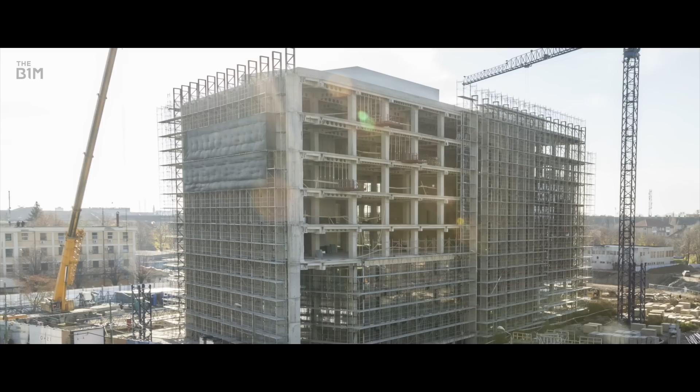While the relentless pressure to construct homes at a rapid rate here does result in some less than desirable schemes coming to fruition, fueling continued debate around housing standards, planning regulations, political representation, social cohesion and inequality, the intensity of the challenge is in fact breeding innovation from some of the city's foremost architects and developers. From urban dentistry to embracing cross-laminated timber, these remarkable schemes master their highly demanding physical and economic contexts to create truly unique homes that challenge the established preconceptions around delivering sufficient levels of housing in one of the world's most densely occupied cities.

The Watts Grove scheme is a 100% affordable scheme for Swan. It's a multi-storey CLT volumetric scheme that provides 65 much-needed homes in Tower Hamlets. The modules will be fabricated in Swan's factory out in Basildon, and the scheme will be on site later this year.

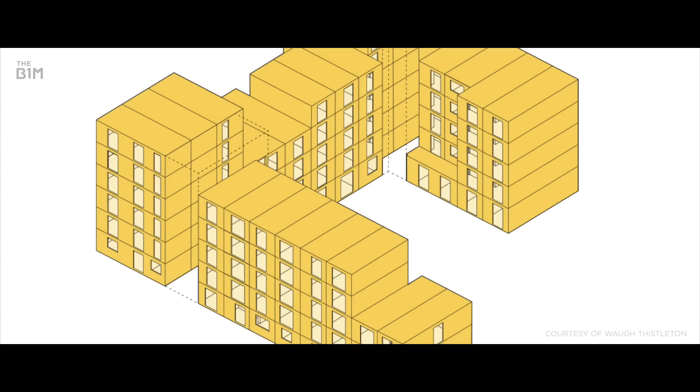One of the reasons that Swan have looked towards off-site manufacture is they want to control their supply chain. As a housing association, they want to provide affordable homes, and London is obviously a large market for that. What they had with this scheme was an outline kind of concept design in a traditional way, which they decided they wanted to construct in modular. And so we got on board at that stage once that shift from a traditional kind of scheme to an off-site scheme was on the table. And that was on the basis of our kind of CLT knowledge.

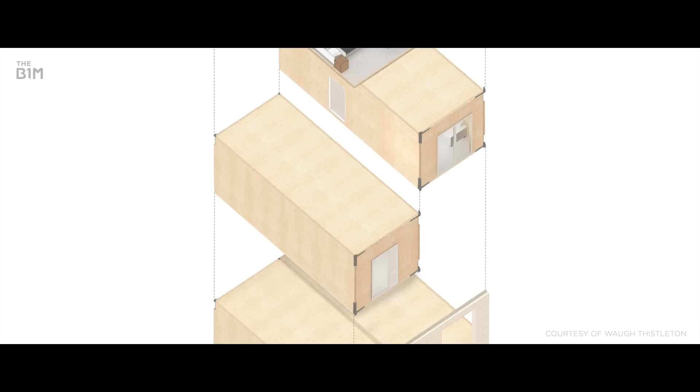The scheme at Watts Grove specifically incorporates 158 modules, 85 different types, which does sound like a lot. But actually the important thing to understand with off-site modular construction is that it's really about repeatable processes and customizable products. And that efficiency in the process allows you to customize those modules in a different way. So that means for a traditional site that was kind of given to us and not developed in that way originally, or not foreseen as being an off-site modular scheme from the outset, we've been able to adapt the design to deliver that.

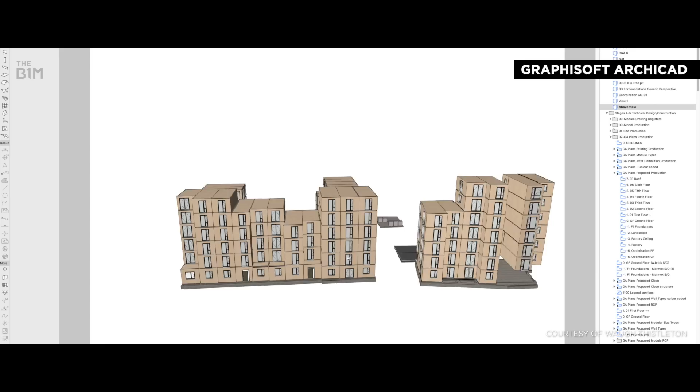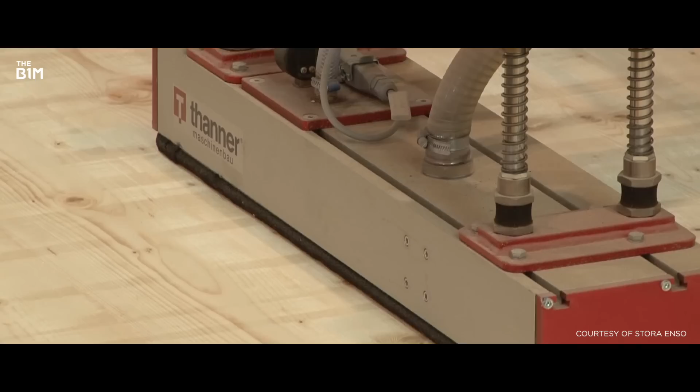So typically when we talk about CLT, we talk about large format solid timber panels. The way in which they're engineered means that you get a lot of strength from a single panel, and those panels can be digitally fabricated to whatever size and shape you need. So it's got a lot of versatility in terms of the forms that it can generate.

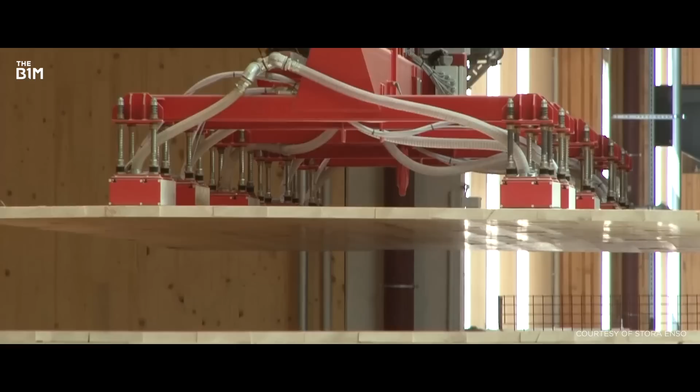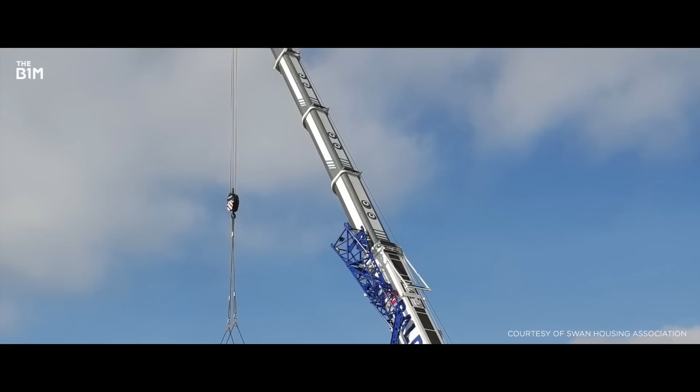With modular construction, those benefits are the same, except you can realise them within a factory environment. So instead of single panels being created and shipped to site, we can build whole units that are then put on the back of a lorry and delivered. So for urban sites, and particularly in the London context where we have a massive housing shortage, we can get the homes that we need much quicker and more cost effectively onto more difficult sites.

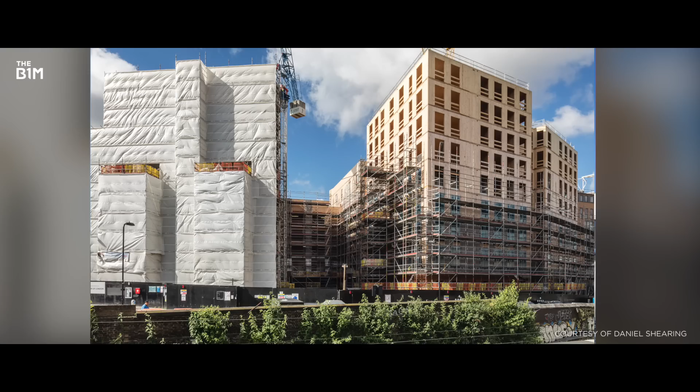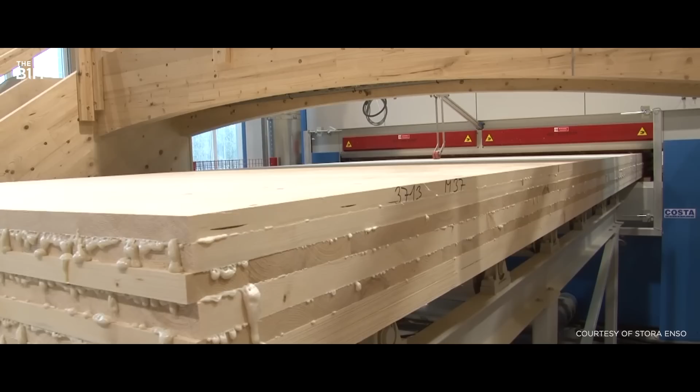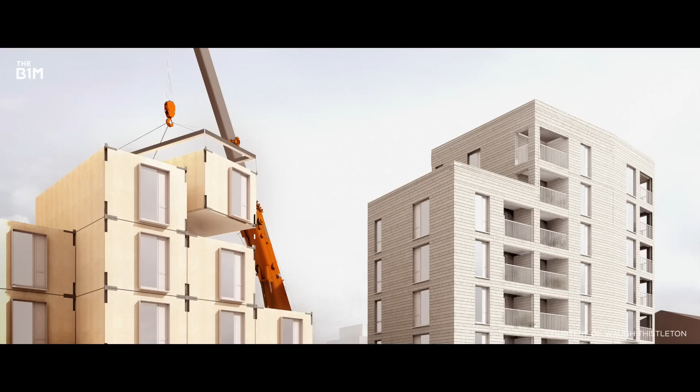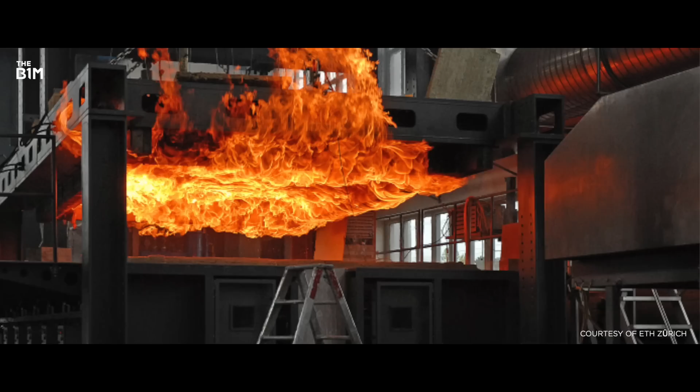CLT is combustible. It's not worth pretending it isn't, but what we do know about timber is it burns predictably. The best analogy is a log on a fire - when you put it on, it burns slowly and chars, and that charring protects the timber. So we know that, we understand that, and we design for it.

In our designs, working with structural engineers, we usually allow for a certain amount of the timber to char within the structural design, and then we supplement that with plasterboard and other products. It's no different to the way you'd protect a steel beam, where it's intumescently coated and finished with plasterboard. Similarly with concrete, it's about coverage over the rebar. It's really just about understanding the material and how to use it. In that way, it's no more dangerous than any other material.

Urban dentistry is this idea of the in-between spaces. Cities often have very iconic buildings or iconic spaces, and the idea of urban dentistry is what happens in between.

That can be a tool for starting new narratives, new types of design, or new ways of thinking about space. You can also bring that into this idea of housing. Housing has evolved - we have lots of different eras of housing. We need to increase density, and we also need to improve housing.

You can look at this idea of urban dentistry as carefully picking apart what's there, or adding to what's there, with that sort of surgical precision. I think that's where the idea of dentistry comes from - very precise and careful, maybe slightly scraping away the bits that don't work and putting in bits that do work.

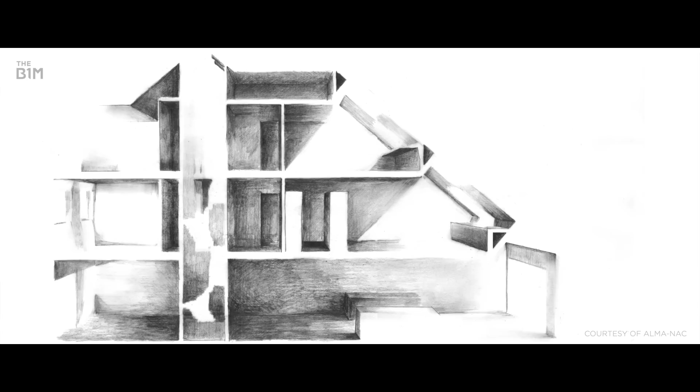What we were doing was saying, well yes it's slim, but how can we work with these spaces to achieve a quality of space and the delight of architecture that you'd get in other buildings? We used that project as a catalyst for talking about these types of in-between spaces.

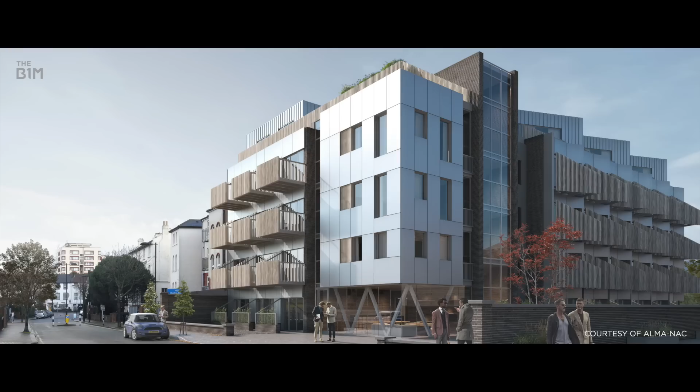Paxton House was an old office building. We took this concrete office block, kept the superstructure, and developed this housing. The principle behind it was the same as the urban dentistry concept - an awkward site overlooking an existing building. How could we achieve a high quality of living space that also made economic sense to the developer, but also to people buying?

It's in Croydon, so it's slightly less expensive, so we could deliver one-bed units that people could genuinely afford. It was built as a build-to-rent scheme, and since then some have been sold. With build-to-rent, there's also a focus on how we can create these incidental moments where people congregate.

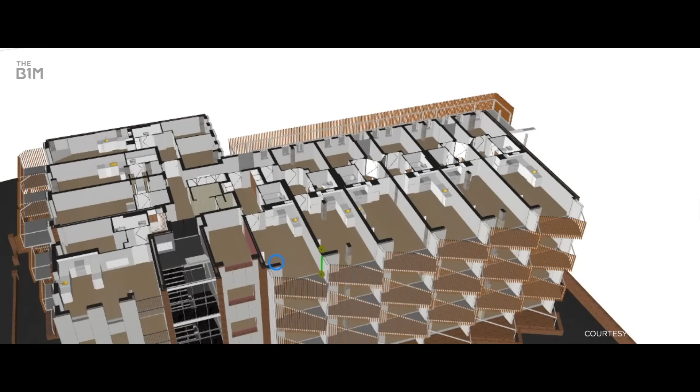At the start, the plan for the building meant there were some poorly conceived apartments that only received north light. We used the Slim House design to flip that - we put all the circulation to the north side, external circulation, which brings down the cost. We also put the services there for easy access, which again brings down the cost. It also meant we could produce slim flats that were all double aspect and all faced south or southwest.

People are expecting a certain solution - a normal solution to that problem - and what we're often trying to do is slightly twist that and ask what else we could do. We have done greenfield projects, which is a totally different challenge, but most of our work happens in this highly complex urban environment - complex in terms of policy, urban fabric, and what we're trying to achieve in terms of sustainability and the environment. All those parameters together set up something where I think innovation really shines. That challenge is really important, but so is not accepting the normal results from those challenges.

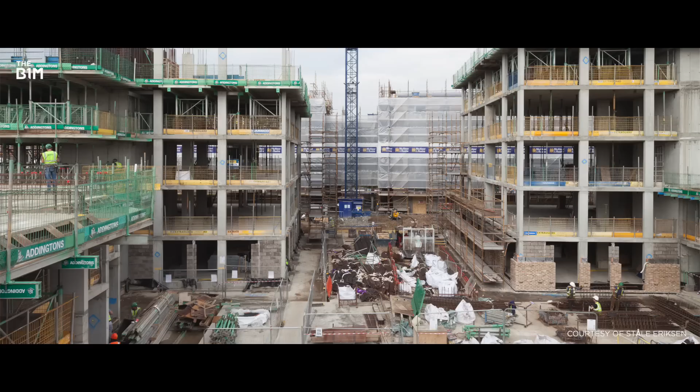Brentford Lock West is a development in Hounslow in West London, next to the Grand Union Canal, that reimagines an industrial wharf site. In total it'll deliver over 500 homes for local need. Mae were appointed to design phase 2, which is 157 homes, including apartments and townhouses, a mix of 1, 2, 3 and even 4 bedroom homes, to meet a range of needs in the area.

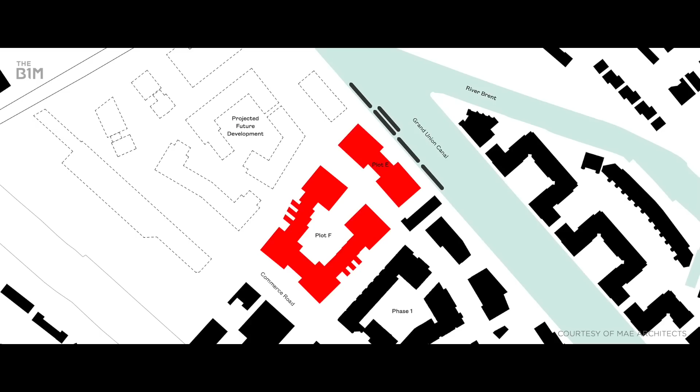The client is a joint venture between Muse and the Canal and River Trust. It's a brownfield site that has been identified for regeneration. The broader moves in the master plan are to connect Brentford High Street, the canal and Brentford Station, and generally make an underused area of Brentford more connected. The pressure in London to deliver more housing is enormous, and the focus is going to be on brownfield sites like this more and more.

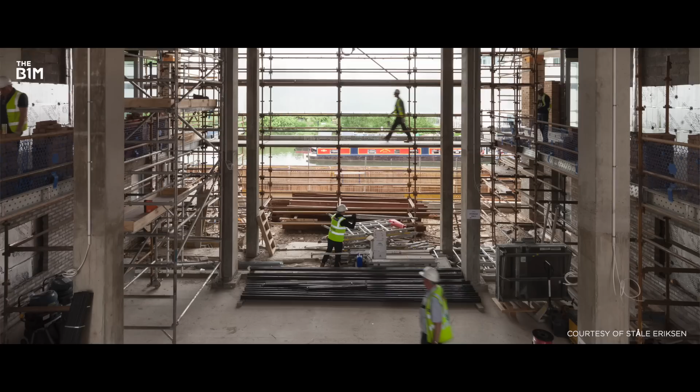There's a realistic and rightful resistance to developing the green belt, and a lot of our housing need can be delivered on repurposed sites, while retaining some of the character in the architecture - developing site-specific responses rather than generic identikit housing. In Brentford Lock West we've developed an architecture that responds to the interesting wharf nature of the site, referencing old industrial forms like the sawtooth roof, which here creates lovely vaulted roofs on the top floor apartments, bringing light into the depth of the plan. We always try to unearth the character and almost the DNA of a site to develop a site-specific response.

So it's a mixture of responding to the industrial past and then trying to marry that with the human scale of a neighbouring conservation area, which is very much residential, Georgian, part of London. Picking up cues in terms of garden walls, gable ends of houses, front gardens - things that enrich that part of the town - so having a richer ground floor experience and streetscape, with the backdrop of larger buildings behind.

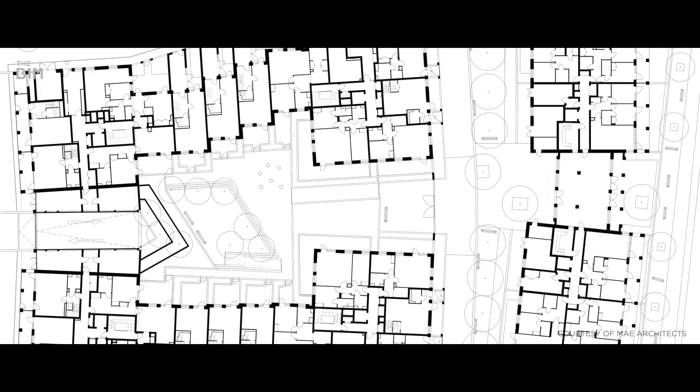Brentford offers us clues about how we think good outer borough housing can be delivered. A number of things we tried to innovate in the project were a new typology of residential block, types of villas connected by townhouses. The villa plan allows us to create a lot of dual aspect apartments with generous outdoor space, really attractive, well lit, generous internal spaces.

So although it's apartments, in a borough that typically would want townhouses or even semi-detached houses, we've created a mix that lends itself well to boroughs that need high density and need to deliver numbers, while at the same time delivering a high proportion of family housing. Brentford will be taking some of those ideas forward into our other schemes. Every project we do tries to reimagine how we might live today and how we can create homes fit for the 21st century.

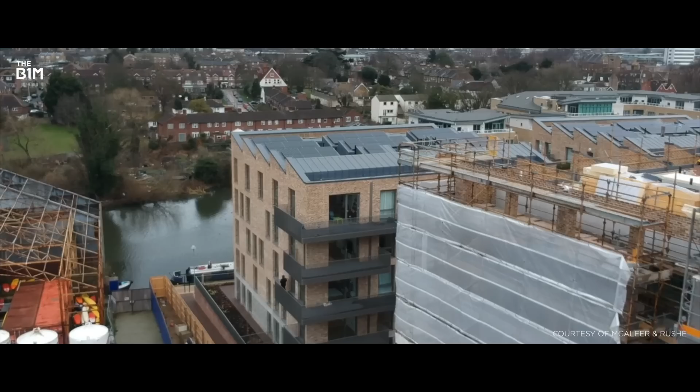For me, seeing something that has been years in the making, working on something from initial concept through to seeing it built is really special, and hearing good things, and the fact that people want to live there and see it as a place they want to live, is really important.

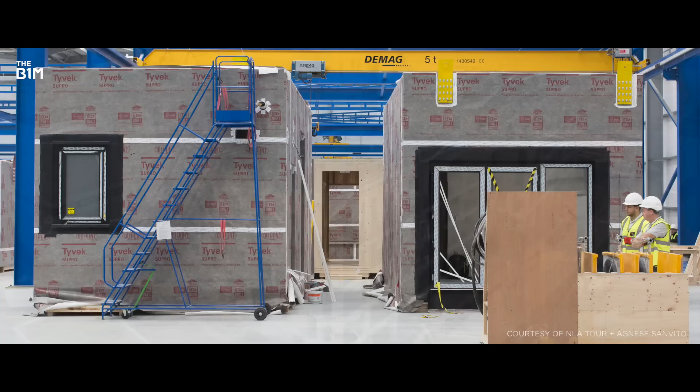From reimagining the waterside to embracing off-site techniques and adapting existing structures, these schemes prove that the challenges of this city's housing crisis can be overcome through innovation, and that the urgency of the climate does not have to drive the delivery of knee-jerk, reactionary developments that sacrifice quality and architecture in order to achieve speed.

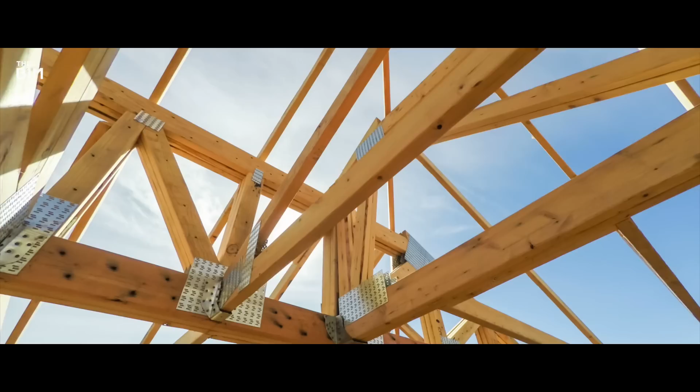The success of each of these schemes in such a densely occupied city offers lessons and guidance for those grappling with the need to deliver housing in major urban areas around the world, and powerfully demonstrates the innovation, creativity and ingenuity that is prevalent throughout our remarkable sector - the world's most important industry, which has the ability not just to build houses, but to create homes for every human being on our planet.